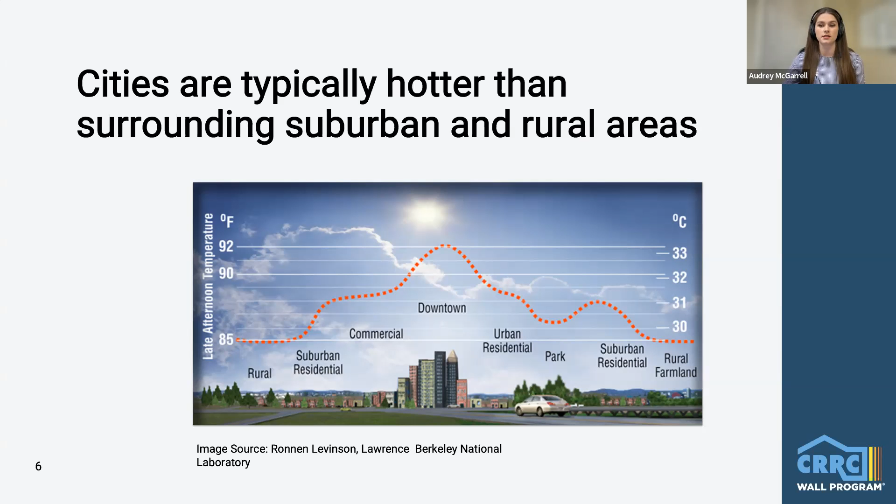Smaller heat islands can also exist within cities. These are typically areas with more dark surfaces and a lack of vegetation. These pockets of heat are often located in neighborhoods where people of color and low-income residents live. A recent study published by the journal Nature Climate Change projects that cities will be 7.2 degrees Fahrenheit hotter by the end of this century. In heat-stressed neighborhoods, this temperature rise will result in even more heat-related deaths and illness.

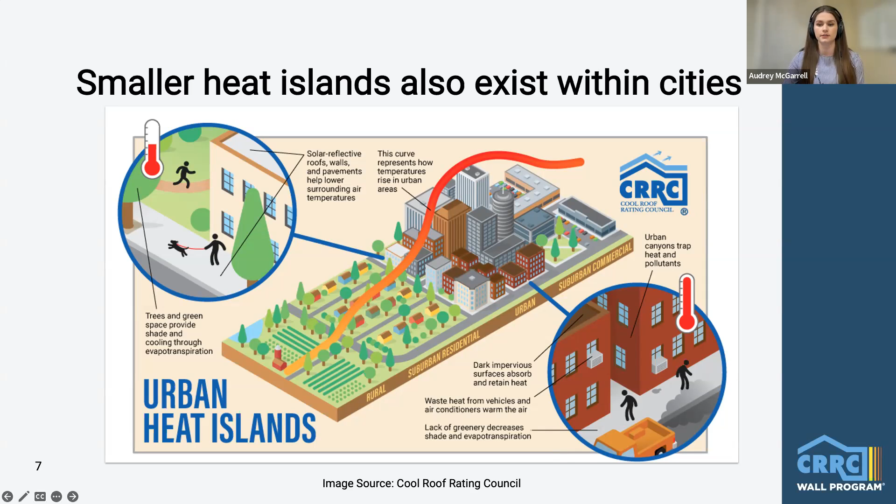Excessive heat can have a severe impact on human health. In many large urban centers in the United States, heat is the leading weather-related killer, greatly outstripping hurricanes, tornadoes, lightning, and blizzards, as stated by Kristina Dahl, a senior climate scientist at the Union of Concerned Scientists, in a July 2021 article published in the Scientific American.

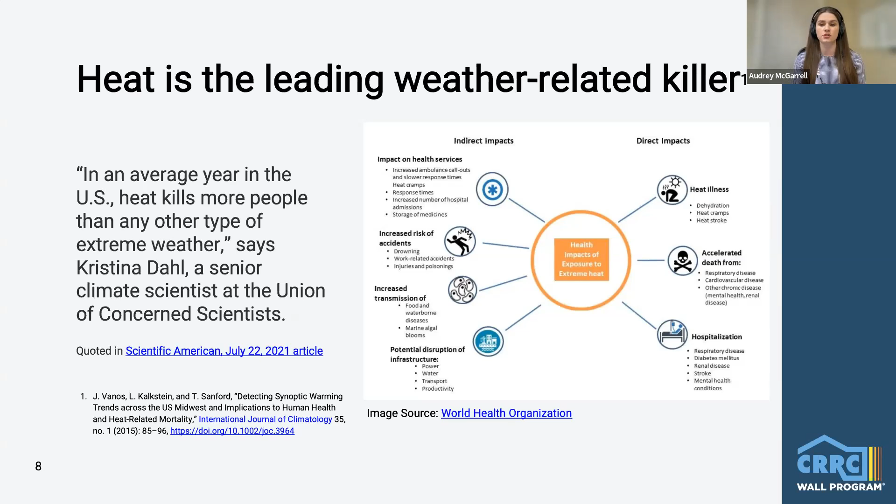There are also other negative impacts from heat, including heat illness, increased respiratory and cardiovascular issues, increased hospitalizations, as well as impacts on health services and disruptions to key infrastructure like power grids and water supplies.

Heat also impacts energy use and air quality. When it's hot outside, air conditioning use increases, which puts a strain on electrical grids. This often can result in blackouts and grid failures. The increase in AC use also produces more waste heat, which adds further to the heat problem.

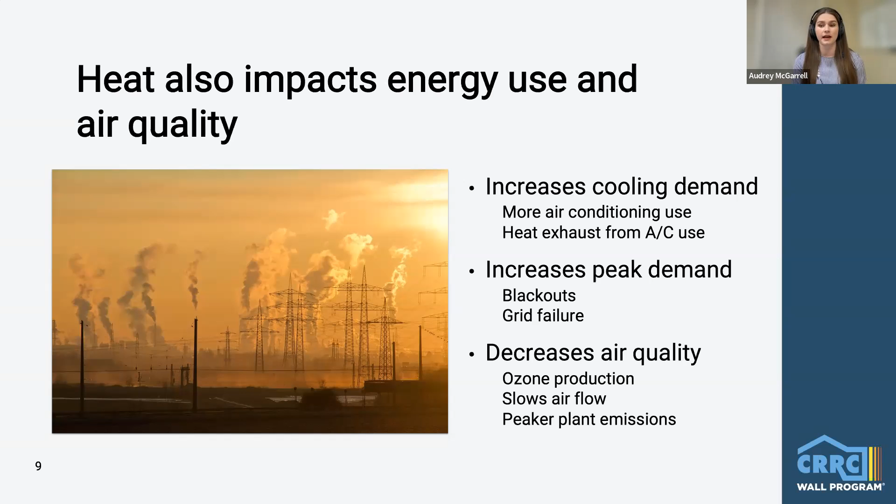Higher outdoor temperatures also decrease air quality by increasing the level of ground level ozone and slowing airflow. The increase in cooling demand from AC use can also result in the use of peaking power plants, which emit air pollution. One solution to mitigate the extreme heat impacts of the built environment is cool exterior walls.

Cool exterior walls are a straightforward tool that some organizations are turning to to mitigate urban heat islands and save energy. They are often a very cost-effective approach with immediate benefits, as compared to trees, for example, which take a longer time to grow and produce their shading and evapotranspiration benefits.

Cool exterior walls help reduce indoor temperatures by reducing the building's solar heat gain, which in turn results in less AC use, which can save the building owner money. On a larger scale, they help reduce energy demand and strain on the electrical grid during peak times. This can help reduce brownouts and blackouts. This reduction in energy use also helps decrease the generation of greenhouse gases.

Cool exterior walls also help reduce outdoor temperatures, which not only helps to mitigate UHI impacts, but reduces ground level ozone, which is a main contributor to smog formation, thereby improving outdoor air quality. In buildings that do not have air conditioning, cool exterior walls can help the interior be more tolerable during hot times of the day, especially in existing buildings, which can tend to have less insulation than newer buildings. This also can apply to air-conditioned buildings that are suffering a power outage.

As I previously mentioned, cool exterior walls can help save energy by reducing the amount of solar radiation that is conducted into an air-conditioned building. A study funded by the California Energy Commission found that cool exterior walls will save energy in residential and commercial buildings in all of California's 16 climate zones, as well as US climate zones 1 through 4, which is basically the southern portion of the United States.

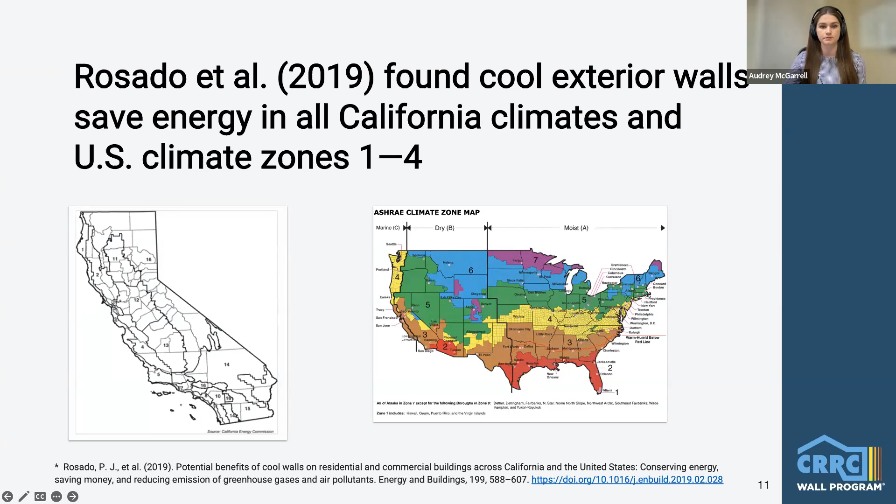A cool exterior wall is one that highly reflects sunlight and efficiently emits any heat that is absorbed. This lowers the surface temperature of the wall and the temperature of the building's interior by limiting solar heat gain. Additionally, the greater the number of buildings in a given area that have cool exterior walls, the lower the outdoor air temperature will be in that area.

The metrics that determine the coolness of a wall are solar reflectance and thermal emittance. Solar reflectance, or SR, also known as albedo, is the fraction of solar radiation that is reflected by the wall surface. Thermal emittance, or TE, is the relative ability of the wall surface to re-radiate any heat that is absorbed. Both properties are measured and rated on a scale of 0 to 1, where 1 is the most reflective or emissive. We'll talk a little bit more about measuring solar reflectance and thermal emittance later in this presentation.

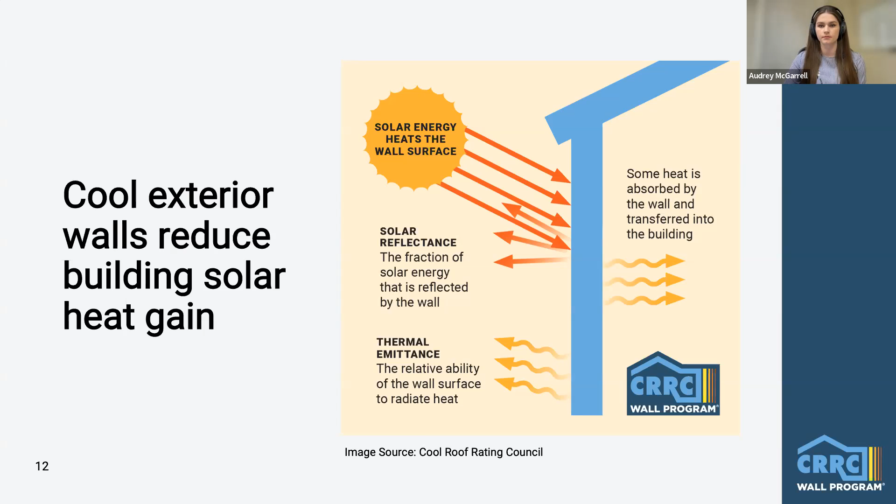Another important factor in evaluating cool exterior wall materials is weathering. Natural aging is crucial for understanding a product's radiative performance over time. In particular, it helps us understand how soiling and weathering affect the radiative performance of various exterior wall products. Early research by scientists at Lawrence Berkeley National Laboratory has indicated that exterior wall products exposed at a vertical angle experience less albedo loss in the first year of exposure than field-applied roof coatings at a near horizontal slope.

That being said, the radiative performance of in-service exterior walls will be affected by various factors, including climate conditions and atmospheric soiling. As we'll discuss later, wall products that obtain CRRC ratings are naturally aged for 3 years to indicate how soiling and weathering may affect their radiative properties.

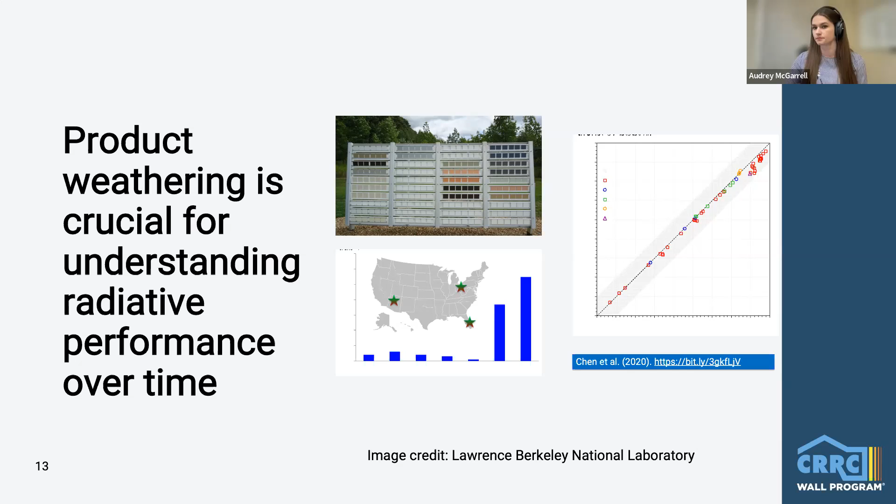So next up, now that we've provided an overview of why cool exterior walls matter in terms of energy savings and urban heat mitigation, we're going to talk a little bit about the current codes, programs, and standards that contain provisions for these building materials. A growing number of codes, standards, and programs require or promote the use of cool exterior walls. Also, I should point out that cool walls are defined differently depending on the jurisdiction. So there's no one set solar reflectance or thermal emittance that is considered to be a cool exterior wall or not.

The state of Hawaii's Building Energy Code is based on the International Energy Conservation Code with state-adopted amendments. The code contains an insulation trade-off and compliance credit for the installation of cool exterior walls. The exterior wall material must have a visible light reflectance of 0.64 or higher. This credit is available for newly constructed tropical homes that meet conditions specified in the code. The state of Hawaii is also currently in the process of updating its building energy code, so it's possible that it will change in the future.

Moving on to model codes and standards. First is ASHRAE Standard 90.1, which is a benchmark standard that provides the minimum requirements for the energy efficient design of most building types with the exception of low-rise residential buildings. It is widely adopted by state and local jurisdictions, and it currently contains cool exterior wall provisions for climate zone 0 and offers a small credit for them in climate zones 1 and higher. Starting later this year, ASHRAE 90.1 will also offer a compliance credit applicable to all US climate zones.

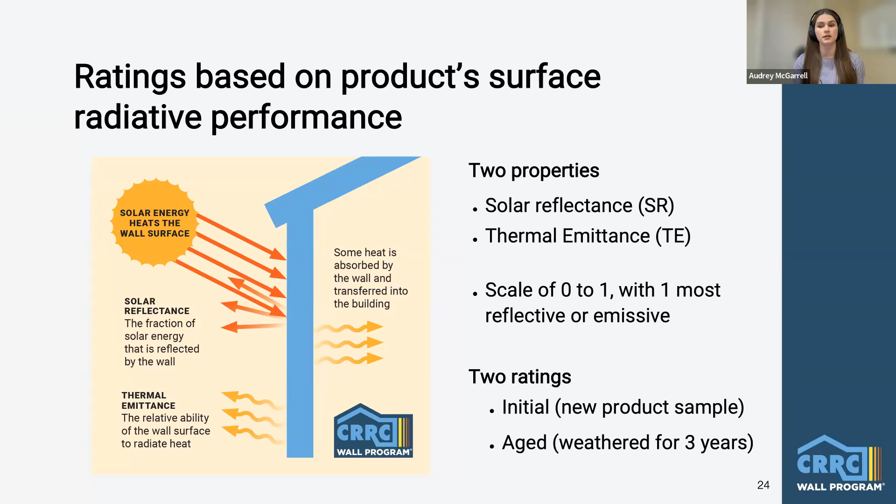Each wall product will have 2 ratings, an initial rating and an aged rating. Initial ratings are based on the measured solar reflectance and thermal emittance of brand new products, while aged ratings are based on the measurements taken after the specimens have been naturally aged for 3 years. As mentioned earlier, aged ratings are extremely important for understanding how the radiative performance of the materials may change over time.

As I mentioned before, the wall rating program is entirely separate from the CRRC roof program. However, there are many similarities, but there are also some significant differences. Like the roof program, the wall program offers initial and aged ratings that are based on measured solar reflectance and thermal emittance values. It requires 3-year natural weathering, and it offers a free rated products directory that is available to the public. Ratings rely on testing by accredited independent testing laboratories that utilize the same industry-vetted test methods. It also offers flexible rating options for different types of products, which we'll talk a little more about later.

Unlike the roof program, the wall program uses a different setting when reading the solar reflectance to account for the 90-degree angle of exposure of an exterior wall. It also does not offer solar reflectance index or SRI ratings. This is because the calculation of SRI is in accordance with ASTM E1980, which does not account for a vertical surface. The wall program also does not offer laboratory aging, which we refer to as rapid ratings, at this time. Some test data provided by manufacturer testing laboratories is also accepted for wall product ratings, and we're going to talk a lot more about that later.

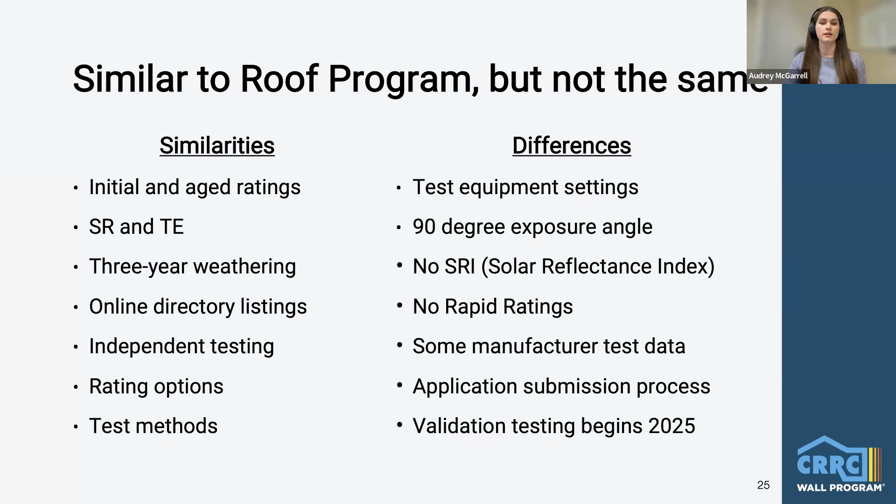The rating application submission process is also different from the roof program, as we use an Excel template instead of an online rating portal. Lastly, validation testing, or what we call random testing in the roof program, will be incorporated into the wall program. However, that's not anticipated to start until 2025. Due to some of the significant differences that I just mentioned, products with existing CRRC ratings in the roof program or with existing SR and TE data cannot be used for wall product ratings, primarily because the exterior wall setting is not used on the reflectometer and because of the exposure angle.

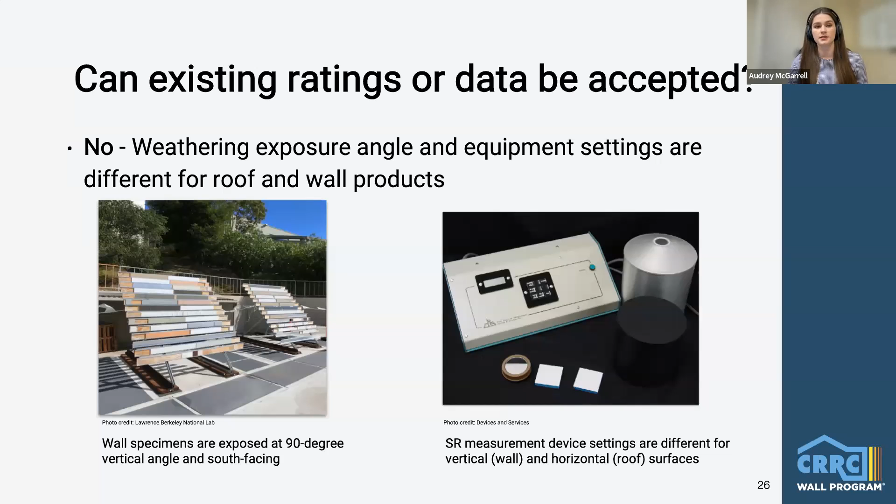Further, version 6 of the Devices and Services Portable Reflectometer must be used to perform ASTM C1549 and the CRRC test method number 1. When the device is used, the operator will need to use the 1.5 GV setting, which requires the version GV9 EEPROM that can be obtained from Devices and Services. The EEPROM is a programmable read-only memory chip that retains its data when its power supply is switched off. And this particular EEPROM is what enables the correct setting to be used on the device. Alternatively, a calibration report can also be obtained from Devices and Services that can be used to extract the AM 1.5 GV results for measurements taken using the default EEPROM that comes with the device.

For solar reflectance tests using the Surface Optics 410 Solar or 410 Solar I, which is another instrument that's approved for the program, the operator will need to also use a different output setting than they would for roofs. This setting is called G197 GT90. Different settings on the SSR provide different parameters for the device. For example, 1.5E focuses on just the direct radiation, while 1.5 GV includes the effects of diffuse light. The V in 1.5 GV refers to it being a vertically oriented surface. The setting accounts for how light interacts differently with the surface based on its orientation. The different device settings and parameters basically change the weighting of each of the 4 sensors to better simulate the precise environment that is being considered for walls.

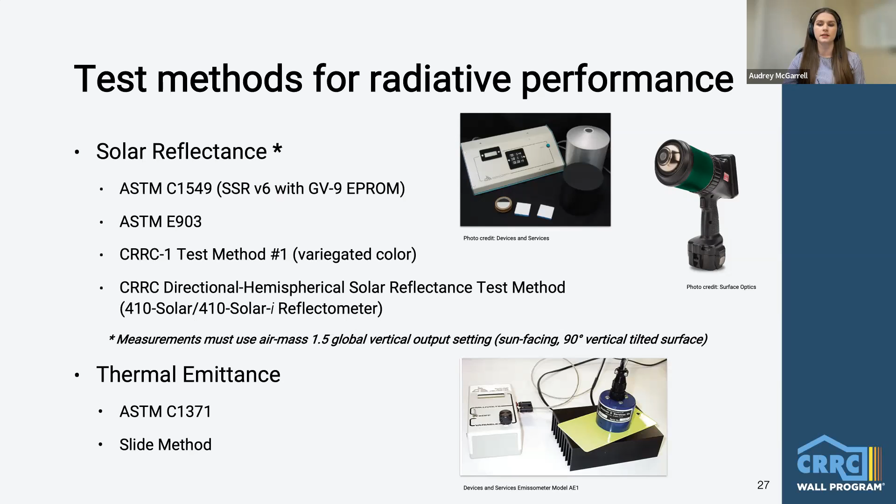Whether or not ASTM C1371 or the slide method is allowed depends on the material's thermal conductance. Since metal has a relatively high thermal conductance, it is no problem to use C1371. For products that have a lower thermal conductance, the slide method is more accurate since it involves sliding the measurement head to different points on the specimen, which prevents heat from building up in the specimen and potentially skewing the test results.

Most of the testing for the wall rating program is done by accredited independent testing laboratories, or AITLs. These are laboratories that have been approved by the CRRC. We also allow certain test data from manufacturer labs. AITLs are required to be ISO accredited, have no affiliation with manufacturing, they must own the proper measurement equipment, and they must attend a CRRC lab training. They must also participate in the CRRC's biannual interlaboratory comparison study for ongoing performance evaluation.

Approved manufacturer test labs, which we call AMTLs, are also allowed to submit data for certain product and rating types in the wall program. Manufacturers of factory-coated metal, as well as architectural coatings, are eligible to become AMTLs. AMTLs must own the proper testing equipment, attend a CRRC training, and provide documentation of their quality procedures. They also must participate in the interlaboratory comparison study. AMTLs are able to submit product rating data for color family additional element ratings, which I'll go into a little bit more detail on later.

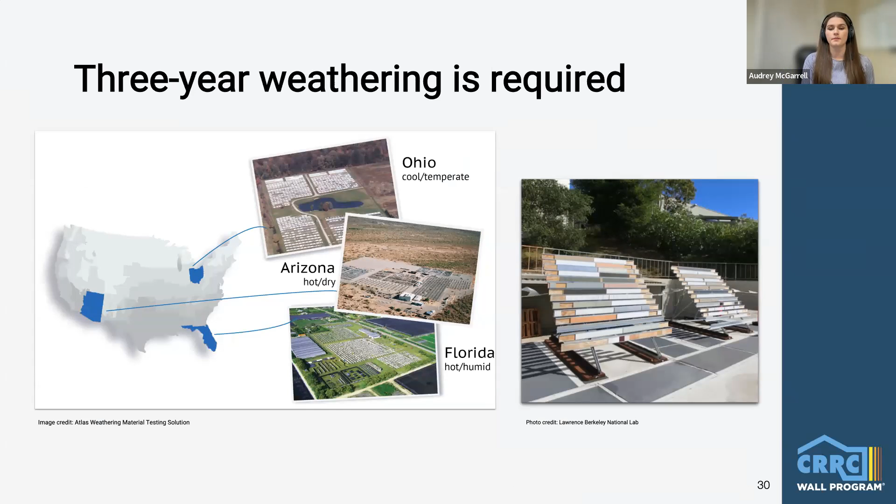As mentioned earlier, wall product samples also need to undergo 3-year weathering at CRRC-approved test farms in 3 designated U.S. climates. Test specimens are exposed at a south-facing 90-degree tilt and staggered to prevent any potential cross-contamination between specimens. Both of the test farms in the roof program provide weathering for the wall program, and these are Atlas and Q-Lab, and their contact information is also available on coolroof.org.

Next, I'd like to take a moment to describe the standard rating process as well as some additional rating options for the wall rating program. The default standard rating process comprises 8 steps. For initial ratings, the first step is for the manufacturer or seller to become a CRRC wall licensee. The wall licensee then completes a product rating application with the product information and sends it to the lab and the CRRC. The AITL will test the specimens and report the data to the CRRC, and then the CRRC will review and approve the data. At that point, the CRRC will invoice the licensee for the product rating fee, and once it is paid, the product rating will be published on the rated wall products directory.

After initial testing is completed, the AITL sends the specimens to the test farm for 3-year aging. After aging is completed, the specimens are sent back to the AITL to perform aged testing. The aged test data is then submitted to the CRRC, reviewed and approved, and published in the aged ratings on the directory.

In addition to the default standard product rating, there are 3 other rating options that licensees can choose from. First is reference ratings for privately labeled products, compound ratings for products that come in various shapes or profiles, and color family ratings for products that come in hundreds or thousands of different color shades.